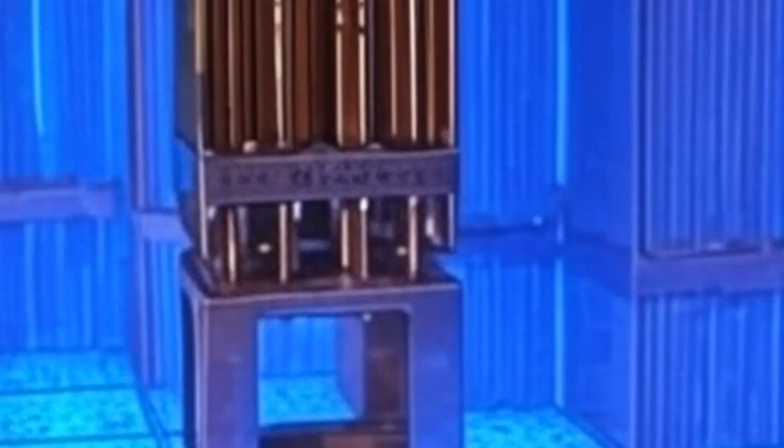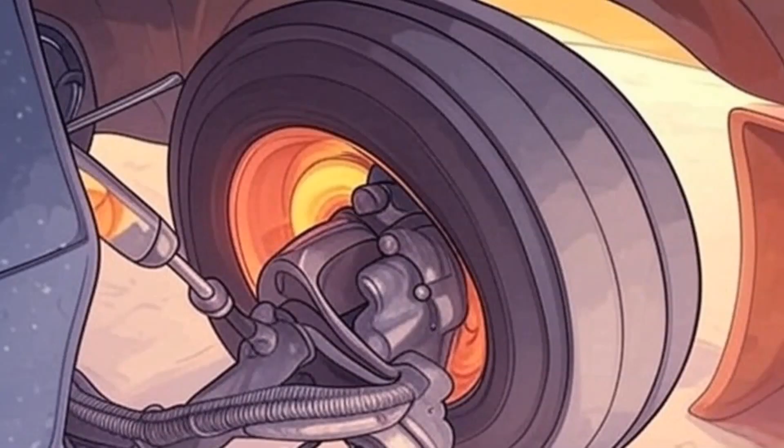Examples from the real world include high-performance systems such as nuclear fuel rods and heat exchangers, air-cooled engines and braking components as mechanical systems, thermal management devices like electronic heat sinks and insulated steam pipes, and manufacturing applications such as injection molding equipment. To make sense of these systems, we often study fins, simple structures with surprisingly rich thermal behavior.

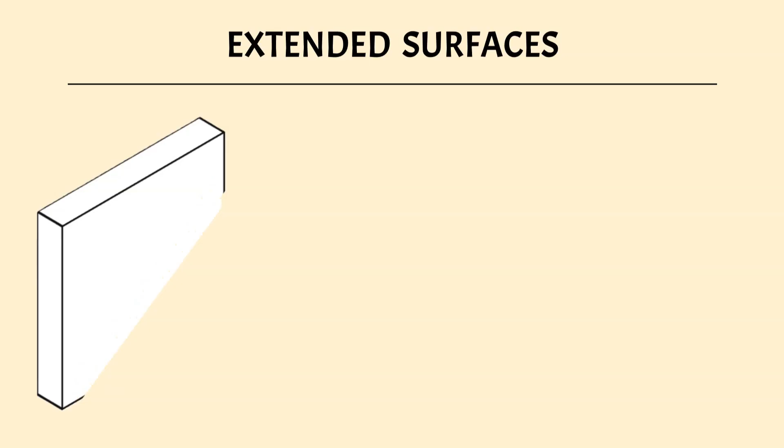Fins, also known as extended surfaces, are added to a system to enhance heat transfer. To understand why, let's start with a simple plane surface.

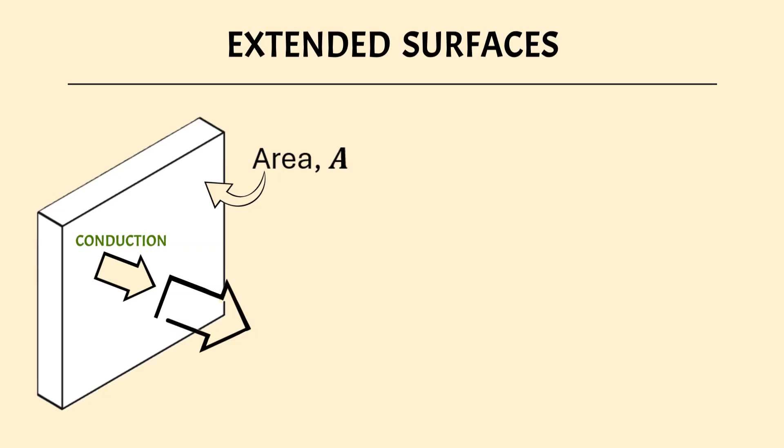Heat conducts to the surface from the interior and is then removed by convection, which we quantify using Newton's law of cooling. Now, if we want to boost the rate of heat loss, we have two main options: increase the convective heat transfer coefficient, H, or increase the available surface area, A.

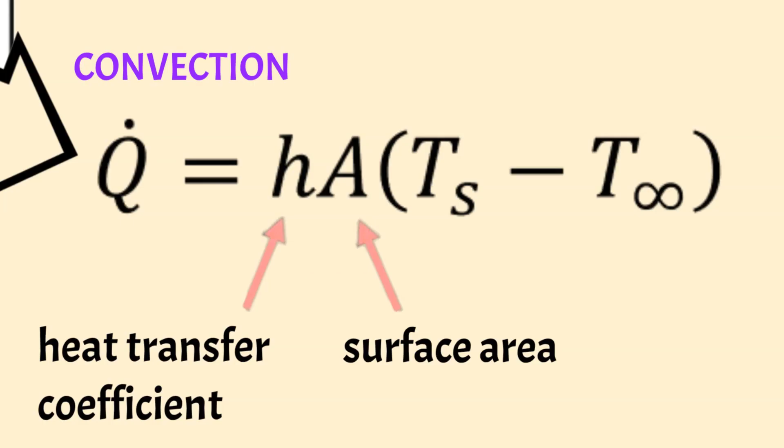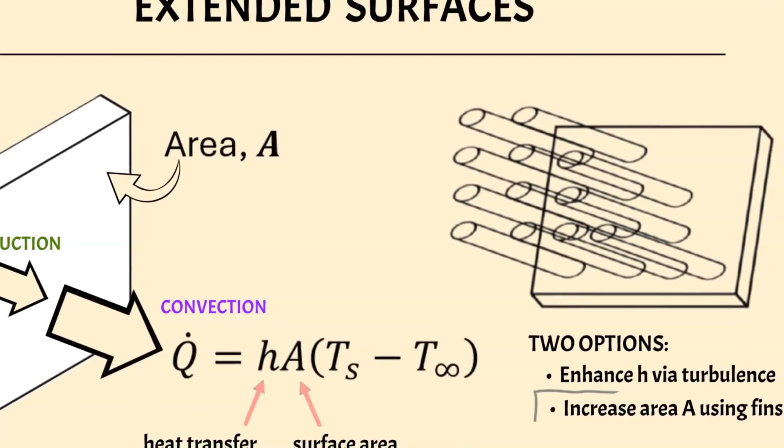In many practical situations, especially those involving air or natural convection, increasing H is difficult or inefficient. That's where fins come in. They provide a passive, cost-effective way to enhance cooling by increasing the surface area, without the need for additional energy input.

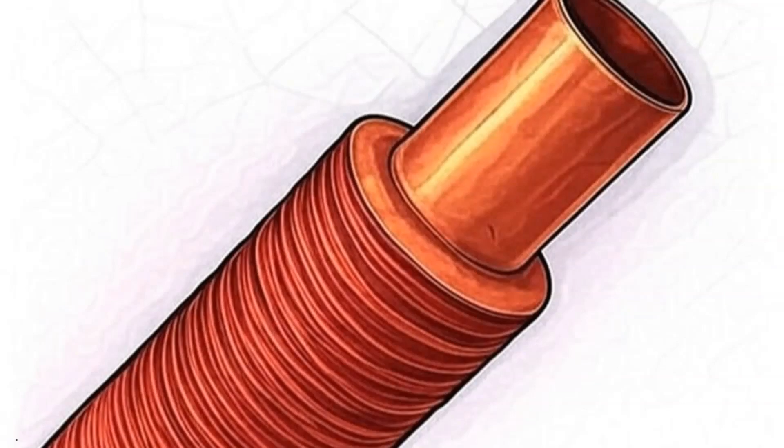Extended surfaces are often arranged into what we call heat sinks. These come in many forms, like rectangular fins, annular fins wrapped around pipes or high-power cables, or pin-type arrays, each designed to balance performance, cost, and ease of manufacturing.

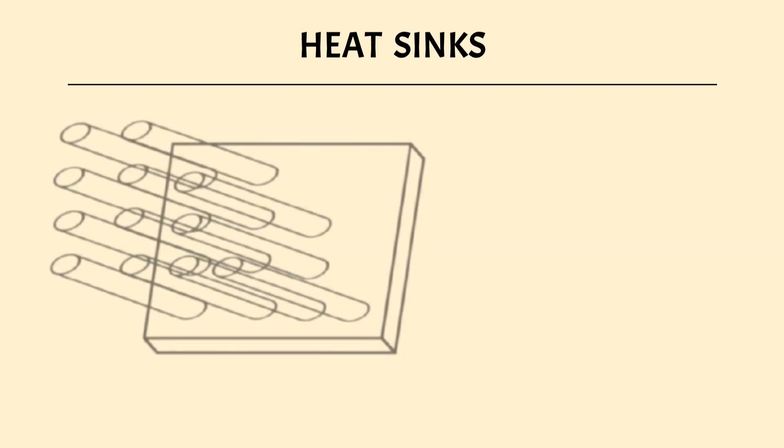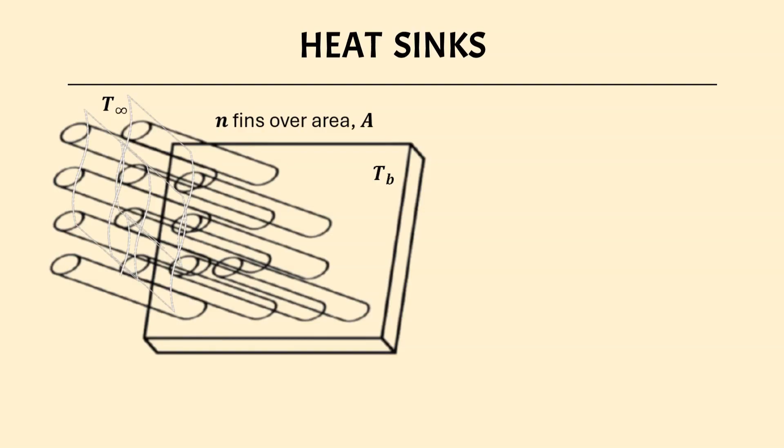Let's now take a closer look at a basic heat sink design, consisting of uniformly spaced cylindrical fins with constant cross-section. These fins are mounted on a base area at temperature Tb, and the array is exposed to ambient air at temperature T infinity. As a first approximation, we often assume the fins are spaced far enough apart to avoid mutual interference, leading to a uniform heat transfer coefficient.

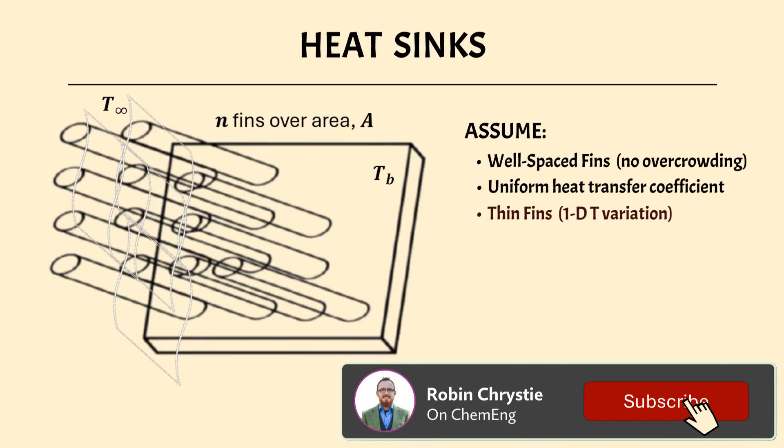The fins are also considered slender, so their cross-sections remain nearly isothermal. Each fin contributes a surface area, A fin, for heat transfer, while the exposed base area still contributes as well. Overall, the extended area greatly exceeds that of the plain base. But to ensure this actually improves cooling, the fins must be made from a material with high thermal conductivity.

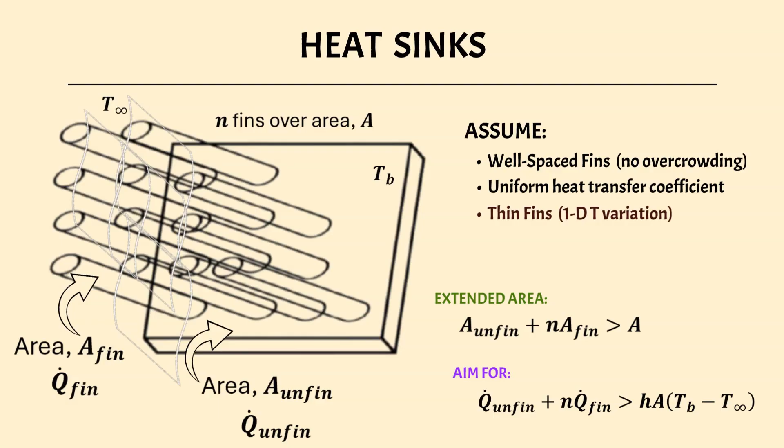To make sure a heat sink like this performs as intended, we need to understand how heat transfers from the fins themselves. That way, we can accurately quantify the total heat flow from the entire system.

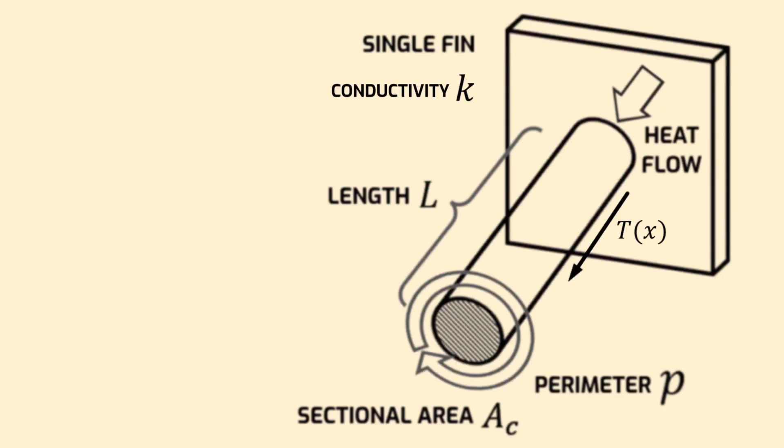Let's consider a single fin made from a material with thermal conductivity K, length L, cross-sectional area AC, and perimeter P. Heat enters the fin at the base and conducts along its length, while being lost to the surrounding air by convection. As a result, the temperature decreases gradually along the fin, typically in a monotonic fashion.

To predict this temperature profile, we use what's known as the fin equation. This comes from applying a differential energy balance along a small element of the fin.

It's interesting to observe when derivation of the fin equation comes up, students nod thoughtfully, murmuring, 'Oh yeah, totally get it,' while mentally outsourcing the derivation to the maths boffin. Like they are subcontracting a plumbing job.

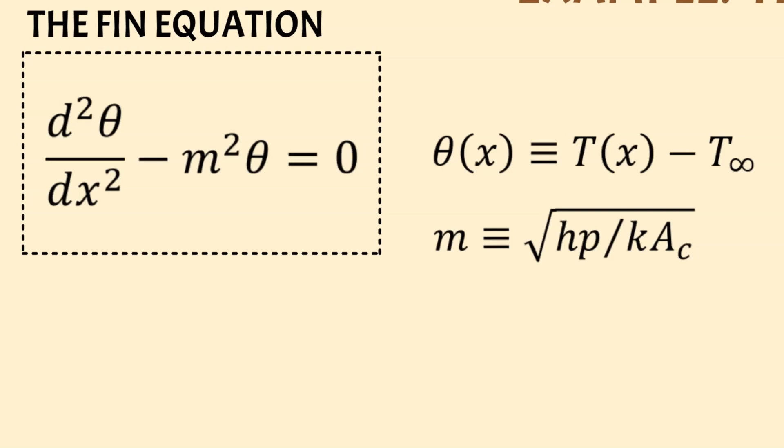But don't worry, we'll skip the derivation. In solving the fin equation, we define theta as the excess temperature above ambient, and introduce a parameter m, which depends on the fin's geometry and material properties.

Since the fin equation is a second-order differential equation, we need two boundary conditions. At the base, the temperature Tb is known. And for this case, a long fin, we assume the excess temperature drops to zero at the tip. Solving under these conditions gives a surprisingly simple expression for the temperature profile.

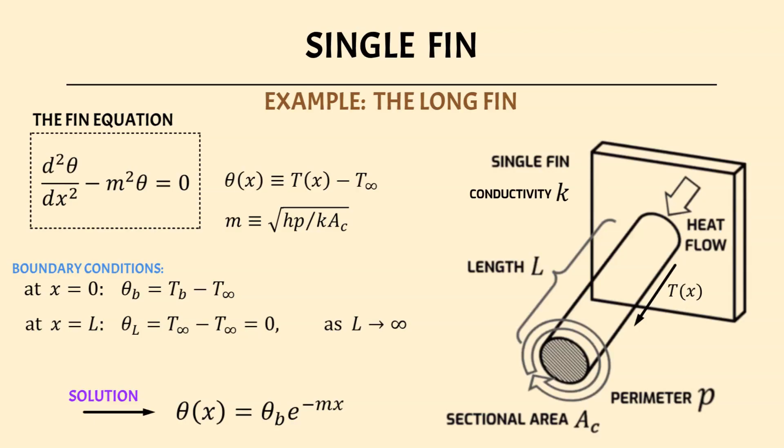Now, we want to calculate how much heat each fin dissipates. At steady state, the heat conducted into the fin at the base is equal to the heat lost to the environment by convection. This balance allows us to quantify the fin's thermal performance.

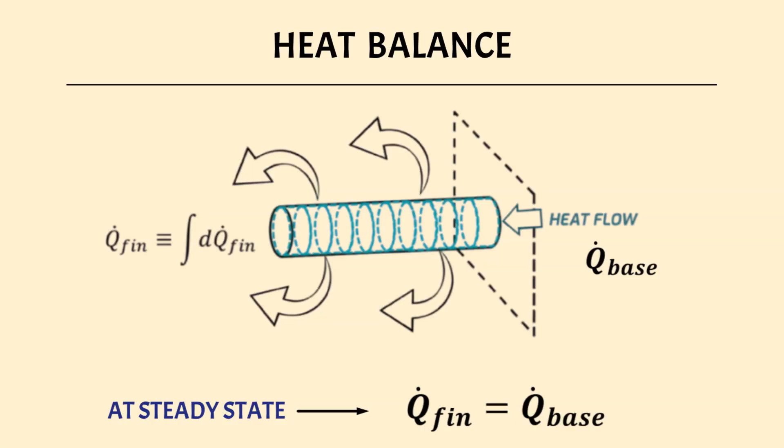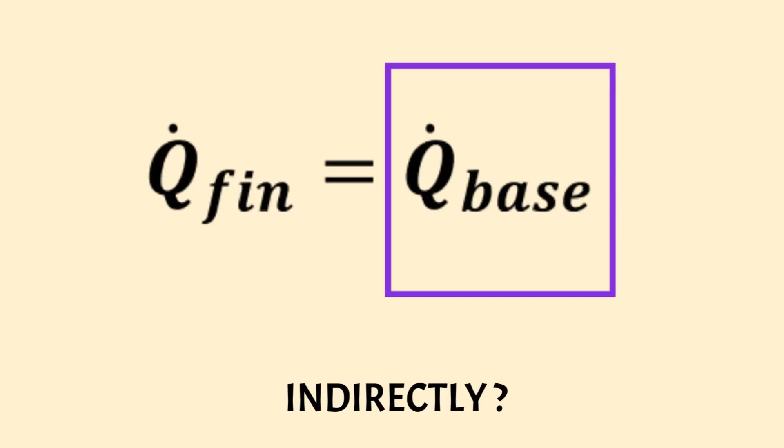Since the heat lost by the fin equals the heat entering at the base, we can take an indirect approach. It's often easier to calculate the base heat flow using simple conduction principles. Let's return to the long fin example.

The temperature along the fin drops off exponentially, a nonlinear profile. To calculate the heat entering the fin at the base, we apply Fourier's law of conduction. What matters most here is the local temperature gradient, evaluated right at the base, where x equals 0.

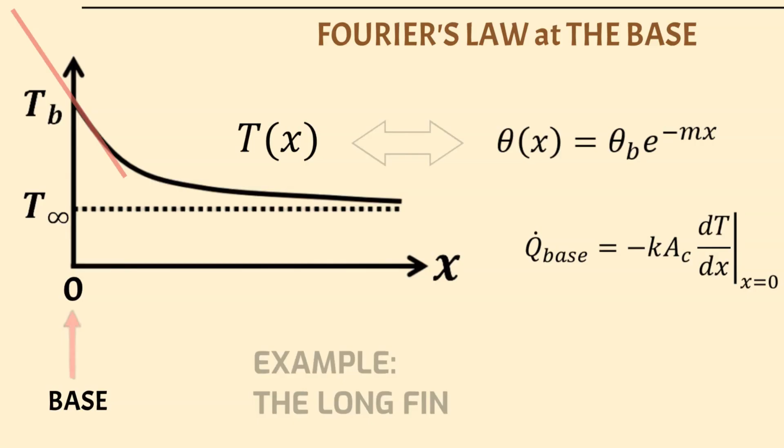Since we're working with excess temperature, theta, we can express the gradient as d theta by dx. Putting it all together, we arrive at this boxed expression for the base heat flow.

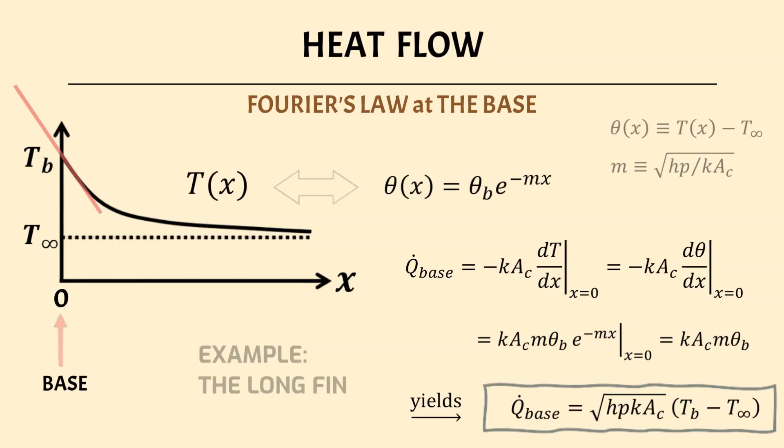After all, if we know the local temperature along the fin, shouldn't we be able to compute convection point by point? Can we, instead, take a more direct approach and calculate Qfin directly? Does this approach give us the same result as using Fourier's law at the base? With the following derivation, we'll shed some light. Let's now dive in.

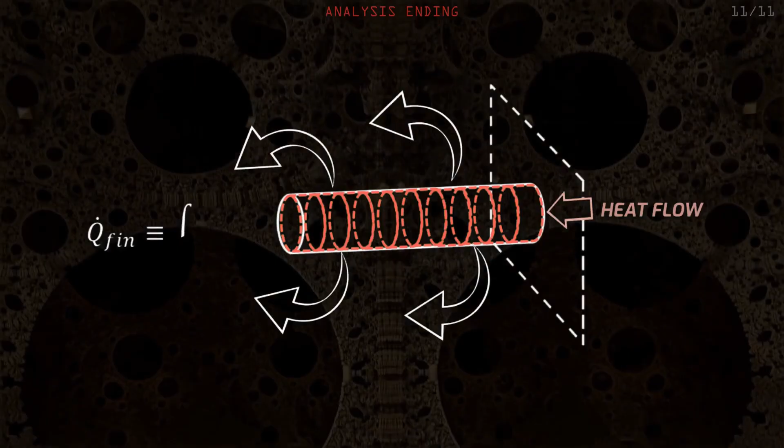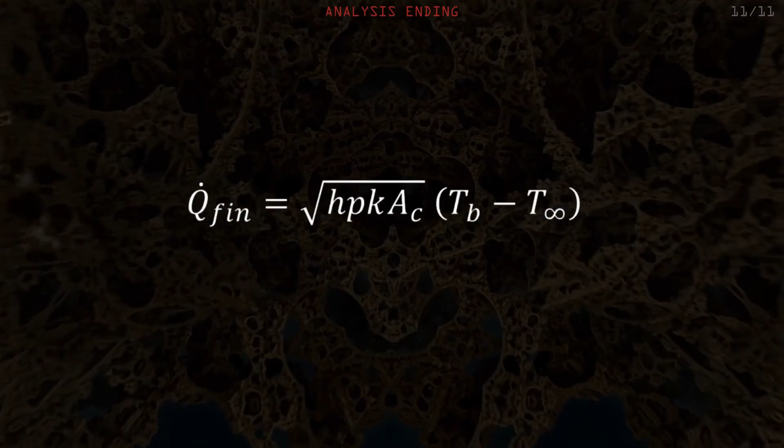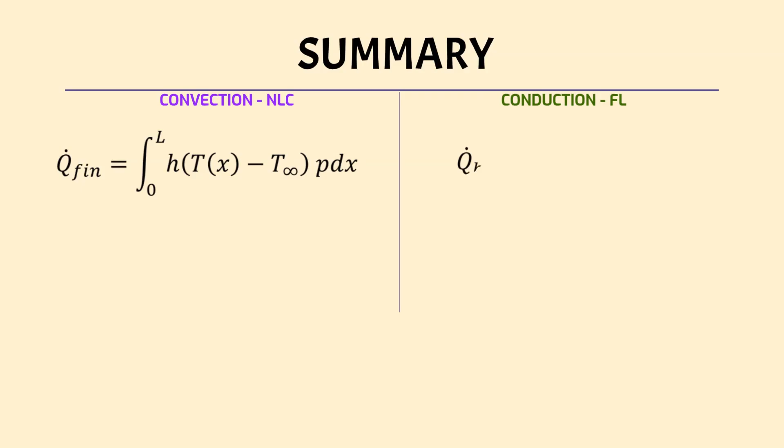Welcome back. During the analysis, we just saw the final result of integrating Newton's law of cooling. What do we observe from this? Comparing side by side with using Fourier's law, clearly the results are identical for the long fin example.

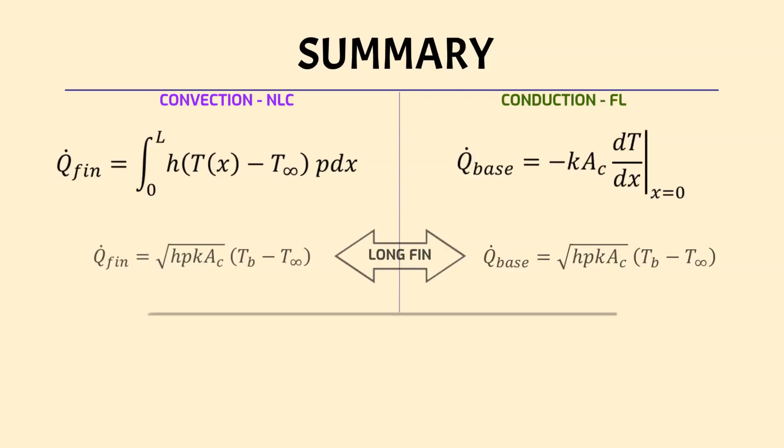Let's pause for a moment and think about what we've just seen. Can we always assume that the heat flow through the base is exactly equal to the heat transferred away from the fin's surface? Does this relationship always hold true? Try to picture at least two situations where it may not. That is, when would Qfin not be equal to Qbase?

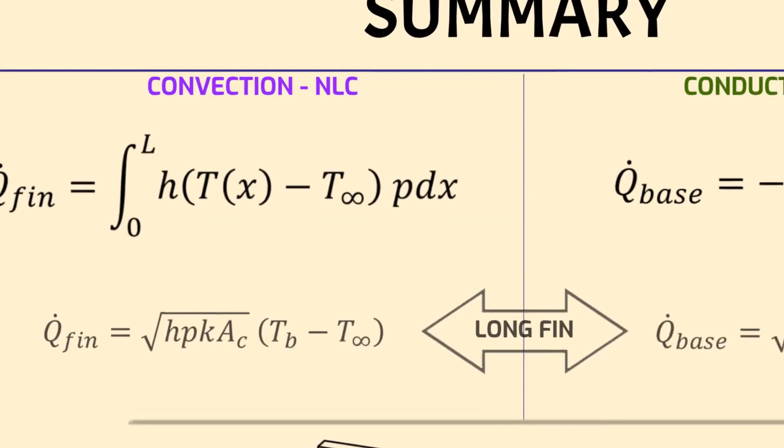These are the kinds of cases where we need to take a different approach and apply, instead, the direct method of integrating convection. With the fundamentals in place, we're ready to assess the system-level performance.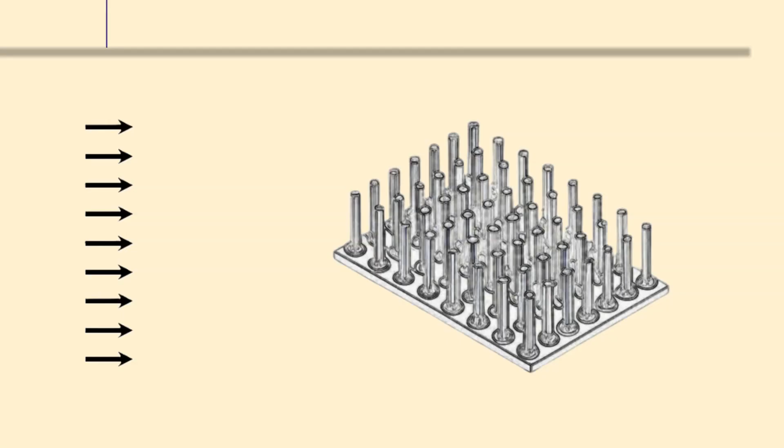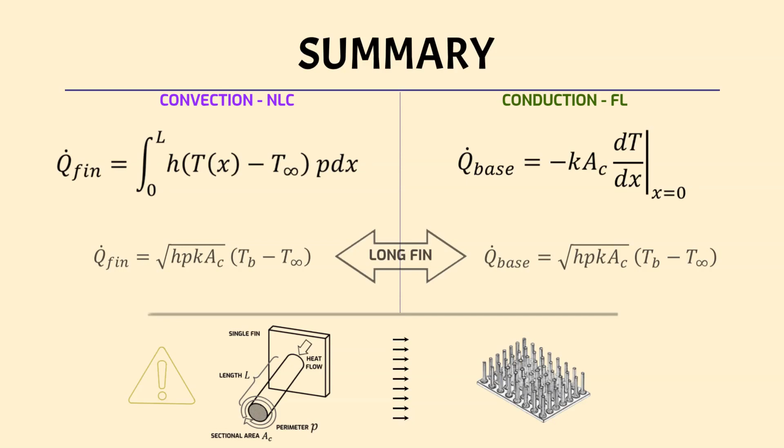The total heat transfer from the heat sink comes from each individual fin, plus the contribution from the unfinned area. And finally, by adding everything together, you get the total heat transfer from your heat sink. Whether it's a single fin or a whole array, the principles remind us, good design starts with clear understanding.